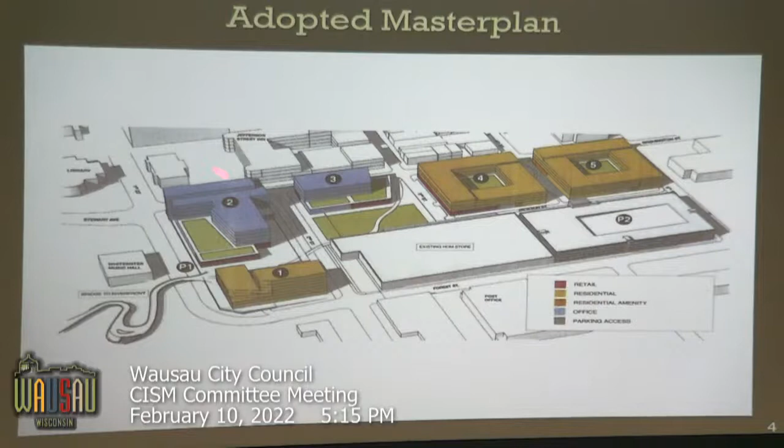And this plan was developed by a firm called Epstein Uhen Architects. What they did is they took a look at this, this is 2nd Street, 3rd Street, 4th Street, Jackson, of how we could redevelop the site moving forward. And HOM Furniture is here, and they're going to continue to stay there.

Next slide please. So with that, the city hired Toole Design. They designed infrastructure, and what they did is started to put plans together of how this property could look, or how the roads could look, and how we could widen the right-of-way so we have a nice experience, rather than having a 66-foot right-of-way, which is really what's happening up here on 3rd and 2nd, and some of those are 60. These are going to be 78-foot right-of-ways. I think your committee's looked at some of those designs in the past.

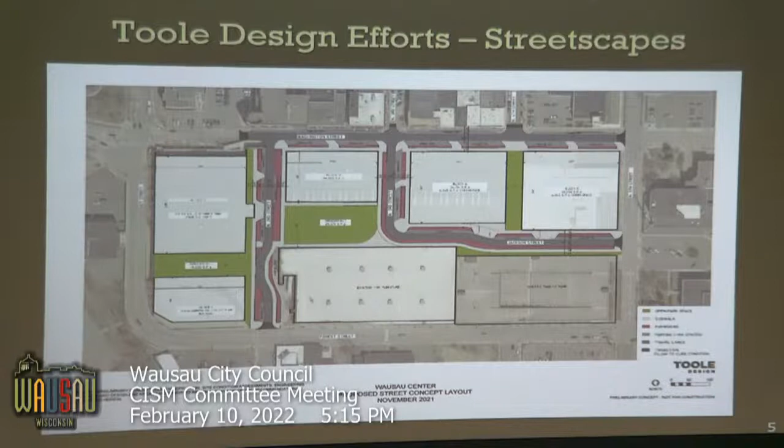Yes. Next slide please. So this is the current land ownership. Anything in blue is city-owned. Anything in green is owned by the Wausau Opportunity Zone.

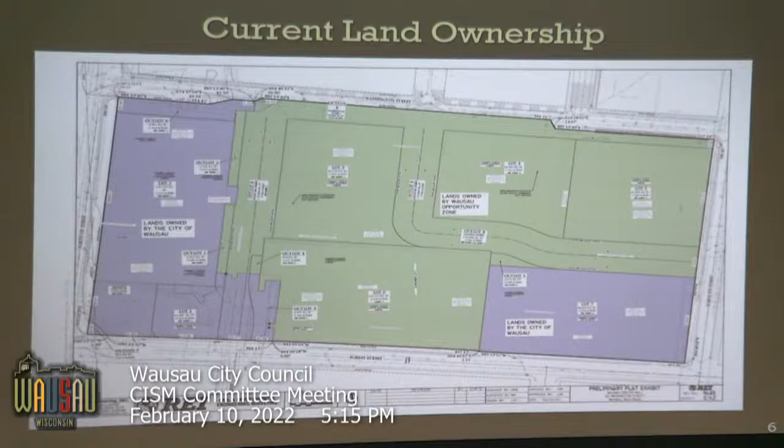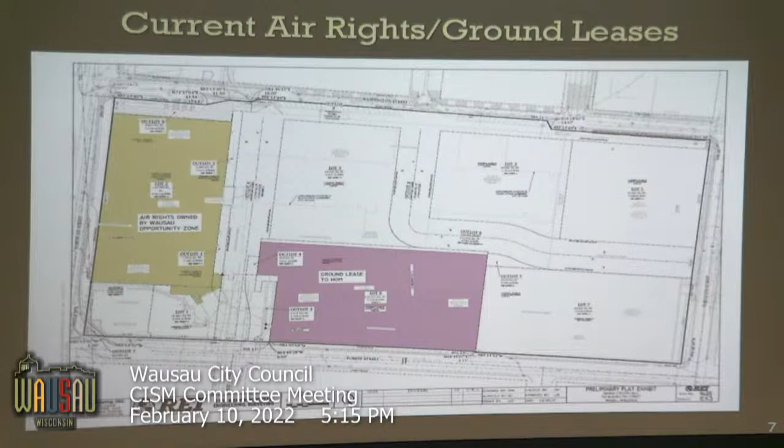These are air rights. This parcel, Wausau Opportunity Zone, owns air rights over the top of the ramp. What that means is that from the Penney's slab, the former Penney's store, up, Wausau Opportunity Zone has the ability to build buildings. On this piece, WOZ owns the land underneath the HOM, but HOM has a ground lease to operate that store on that property.

Okay, this is our plat, and we colored it up to help identify things, so we'll walk through each lot. Everything this color is going to be Lot 2, and we called it Lot 2 because there's air rights that have to be purchased by WOZ, or there's a desire to purchase that over the top of this portion, because right now WOZ does not have those air rights.

This is Lot 1. This is land currently owned by the city, but you can see the air rights dip down in here, so we're going to have to clean some of that up. With this plat, we're doing a couple different things: one, we're redividing the land, and two, we want to clean up some old title issues, and there's some dedications that need to happen to clean title up as well.

So we have Outlot 1. This land is currently owned by WOZ. The reason we have this outlot and this outlot is because when we dedicate the street, remember, WOZ owns up to the face of the old Penney's building.

These two pieces have become remnant properties. The upside of those being remnant properties, remember, is that WOZ owns air rights over the top of Penney's. So when this project develops and turns into the next useful part of its life, these properties can then serve what's happening with those buildings. Maybe these become seating areas outside, or maybe they become part of the building process. That's the reason it makes sense for it to stay within WOZ ownership.

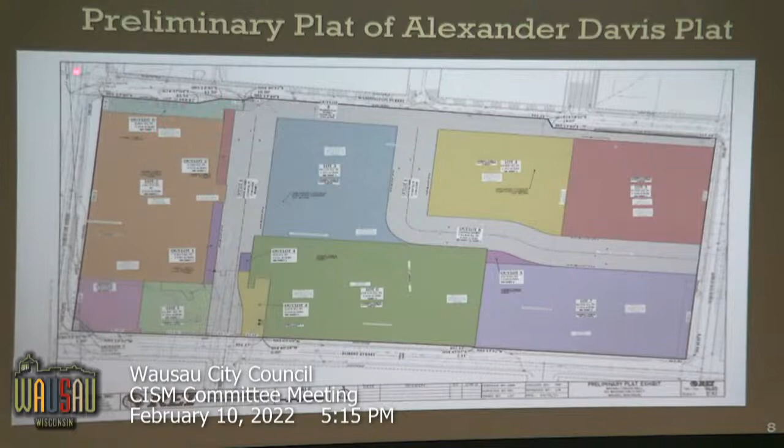Next slide please. So we received the conditional use, or the conditional letter, from the city, and we want to just address street grades. That'll be a future engineering design effort. The purpose of the outlots is everything we just talked about. Some are remnants that kind of get caught up, but they all serve a good purpose. The PUD will be amended when we come in with development for each block or each lot. Same thing, utility design will be designed by the city engineering staff at the appropriate time.

Next slide please. Parkland dedication, we recognize it's going to be $200 a living unit. That one's going to be tough because we don't know how many living units we're going to have until the building plans come in, so we'll have to have some conversation about how we address that. Maybe a good chunk of it gets paid up front with the recording of the plat, with an understanding that when we have the final design, more is owed or some is returned, however it works out.

One of the staff asked that we square off the right-of-way at 3rd and Jackson Streets. We'd preferred not to, the reason being that's the main entrance to the HOM store, and that's that sight line down 3rd, so we want to give that entrance some nice treatments. The easements, as we go through the design effort throughout the next several months, we'll be placing easements across the property where need be, and those will appear on the final plat.

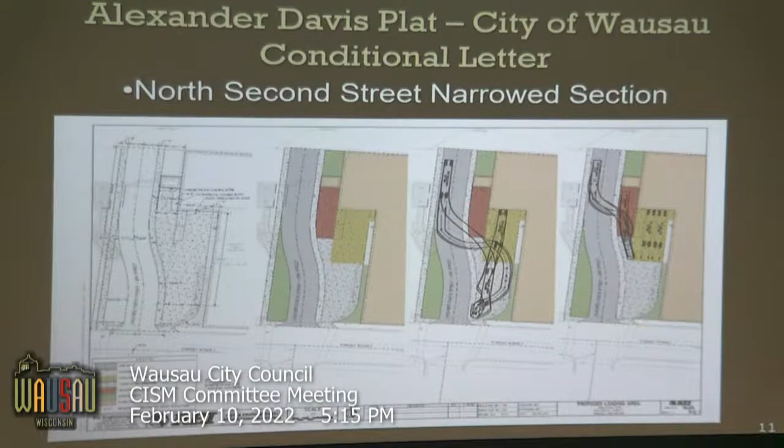So that's the end of the presentation. With me is Joe Mello from Reuter, if you have any questions about any ownership or deals, and Josh Prentice is with me, he'll pull the plat together. Does anyone have any questions about the plat?

This actually is similar to the plan when we decided what width we wanted the roads. When they were here last, obviously they had talked about the fact that they would deed the land over to the city that was needed for the roads. So when we looked at what we wanted for the width and the amenities that we wanted to install in that right-of-way, that's where we ended up with those wider configurations for those streets versus what we see like on the current 3rd Street.

So, Deb, go ahead. Thank you, Lisa. Maybe I'm thinking about the consultants that came up with this design from Lower Michigan a few years ago. I thought originally the Sears area was supposed to be green space. I didn't think anybody wanted to build across from the jail.

No, there were two buildings on that side, and then where 4th Street comes into the project, there was some heightened landscaping or something, I think, on the plat. Yeah, if you toggle back several slides. Way to the beginning? Yeah, it's probably about the 5th, keep going back.

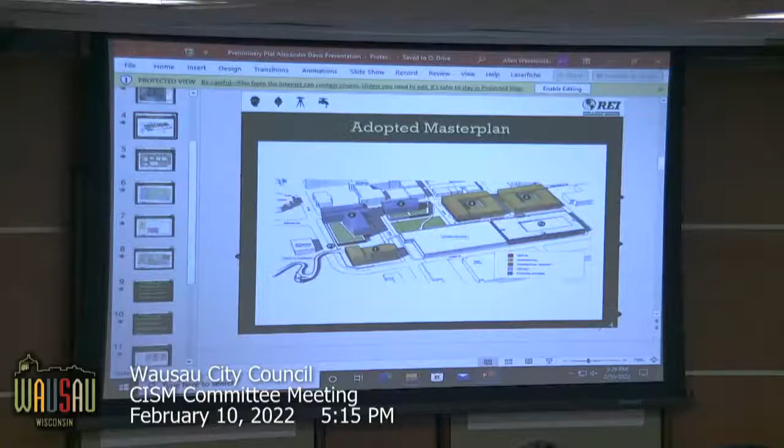One more, there you go. So there's the jail right there, and we had planned a building with a courtyard. I believe these buildings are going to take a U shape with the courtyard in the middle. That's kind of the direction they're heading now. And then this would be a pedestrian corridor to get, well, this would drop down to the parking garage, and this would be a pedestrian corridor out to 3rd Street.

Okay, additional questions for the design group?

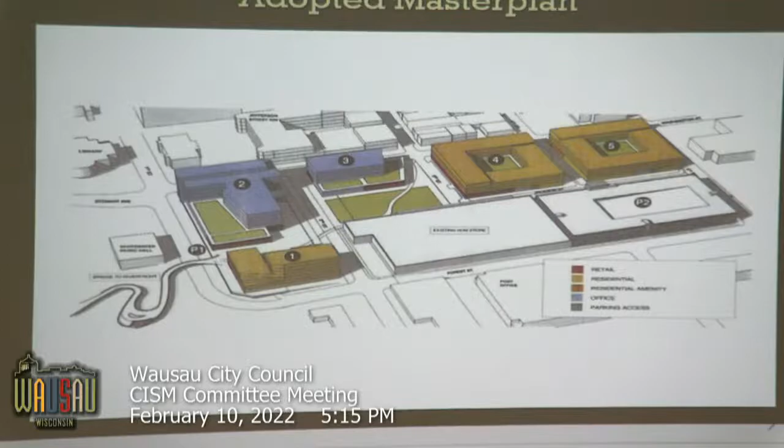If not, our staff recommendation is to recommend approval of the preliminary plat so they can continue down the next steps, which we'll see along the way. Is there a motion to accept the preliminary plat?

I had another question. In regard to that pedestrian walkway, the S curve, are you planning to have that connect to the buses as a place to drop off or pick up people? I don't intimately know the bus route, but I'm assuming it will reflect picking people up in this neck of the woods. We haven't connected with the metro at this time. This will terminate down on River Drive. Again, I'm sorry, but I can't answer specific questions about where the bus route is at this time.

The other thing is with the pedestrian skyway, is that going to be motorized for those with disabilities so that they can use it? It's going to be set up at a grade that's ADA acceptable.

If that does not get approved by the state grants, do you have an alternate plan? Joanna, you might have to field that question as far as payment. Well, is that bridge part of this plat though? It's not part of the plat. Because then it's not on our agenda, so we'd have to visit that separately. All right, good. So this is just the street grid going in where the mall buildings were.